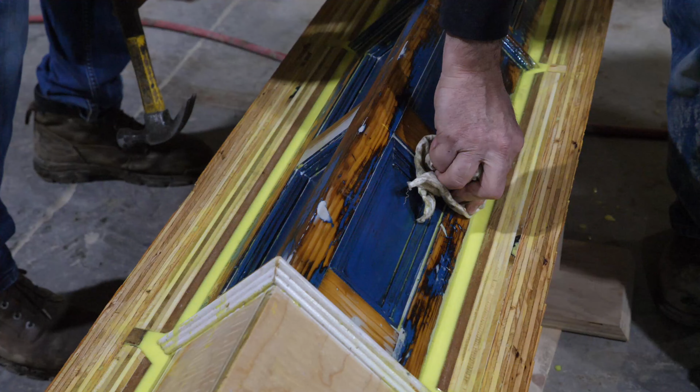This would have been out of probably an 1850s house. So, I mean, you can even see they used an old growth pine to make it. You just never see the lines that close together. And then Tim did a great job repairing it. He made some moldings that match the old. Let's see that right there. Great, nice job, Tim.

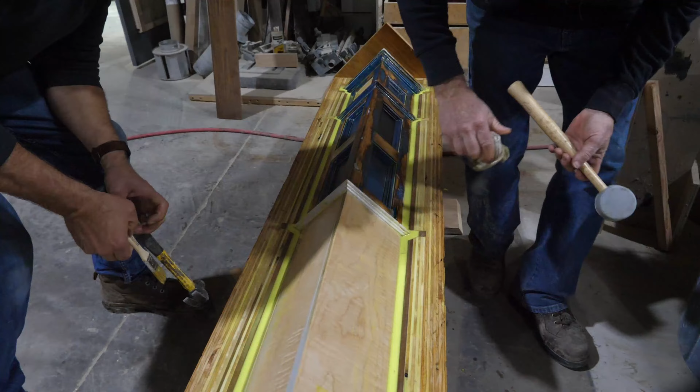Once the mold is poured, is that original piece still going to look like that? Yeah. It just peels right off? Yeah, supposed to. That's our hope. Yeah. So we sprayed it with a silicone mold release spray. But sometimes the porosity of the different materials grabs that rubber and it makes it real difficult.

You know, it's the first one of this complexity that we did, as large as we did, and there's just so many nooks and crannies in the old post that the rubber grabbed too many places that we couldn't get it off, and we started trying to pull it off and we ended up ripping the rubber. So I think as we're taking it off too, we're not sure if this is going to go back together when we pour the new mold as we thought.

And I think it's going to be such a great mold that we want to make it out of something that's more durable. So I think we're going to make it completely out of metal now. So that's why Missy's here. Yeah. So I think what we want to do is flange 4 pieces. Okay. 1-inch flange. Yeah. You know, with holes that align it every, I don't know, couple inches, every 3 inches or something.

And then Tim's going to take, you know, looking at it from the side view, it's got the flange. He's going to make these little plugs because we really like this so much that I want to pretty much duplicate the centers and everything. So then he'll make those and we'll screw those on there on each panel. So we need 2 holes in each one, probably like a 10-32 or something.

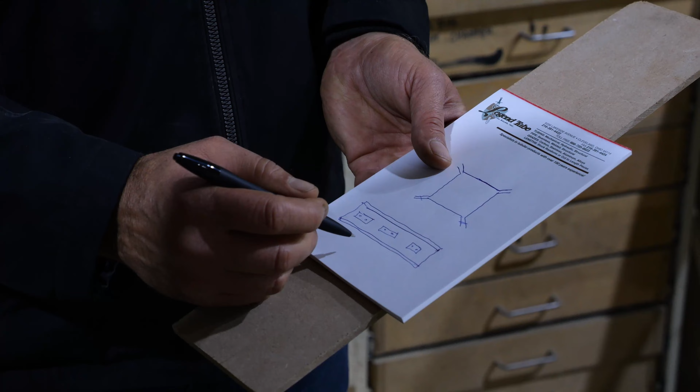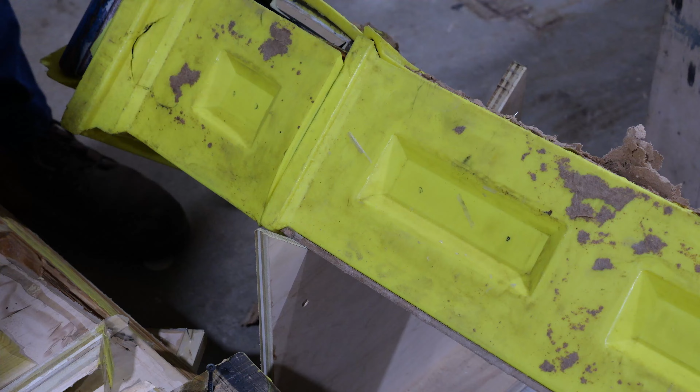Okay. So basically you'll be putting a hole here, you know, we could just stay the same distance from the edge or something on all of them. And then he'll glue those on there. And then this top part, he's gonna make a rubber mold again of this. And then we'll pour everything. And then we'll pull this outer box off in 2 pieces, cut the rubber, peel the rubber. So then you unbolt the 4 pieces of metal. Okay. So it almost has to work, right?

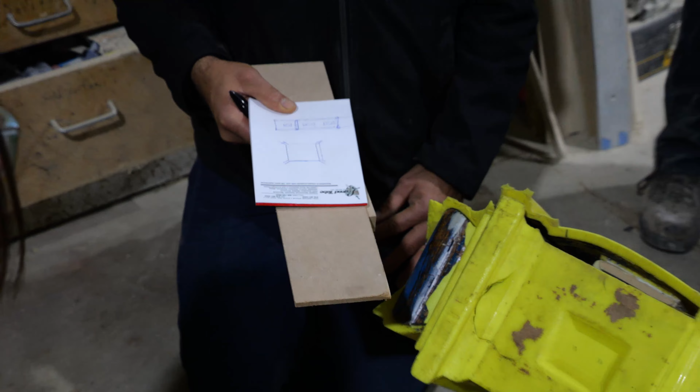Okay. So we'll just duplicate this thing up basically exactly. Tim's gonna make his plugs, you know, the same size as this. We just like this so much. I mean, look at that. Yeah, it's a really nice detail. You know, some craftsman 150 years ago made all that. So it's pretty cool.

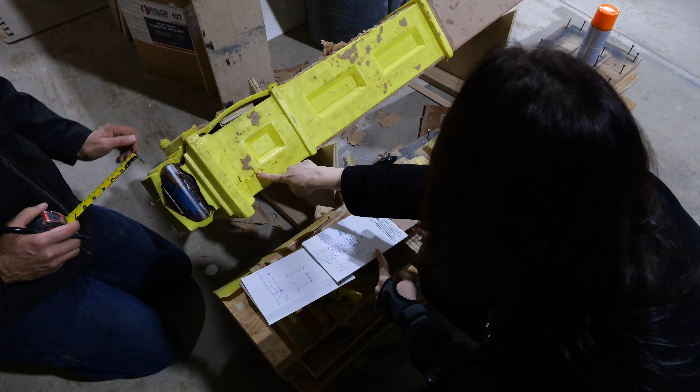And it looks like this is not centered. See that? 4 by 3.5. I bet if you look up 4 by 3.5, it's the golden ratio, yeah. I bet it is. So it's pretty amazing that they proportioned and moved things around instead of just centering it. You know? That they felt like it was worth it.

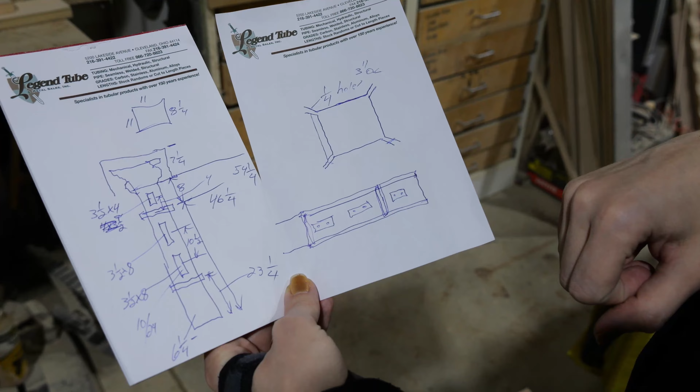So I'm going to take all these dimensions back up to my CAD program. I'm going to create one of the panels of the 4 with all the dimensions that we did with holes added in, and then I'll duplicate that 4 times. To have Grant weld in a little stiffener in there, and then another stiffener at the bottom. And then at the top, you'll have to weld a flange in for that box to come down and sit on.

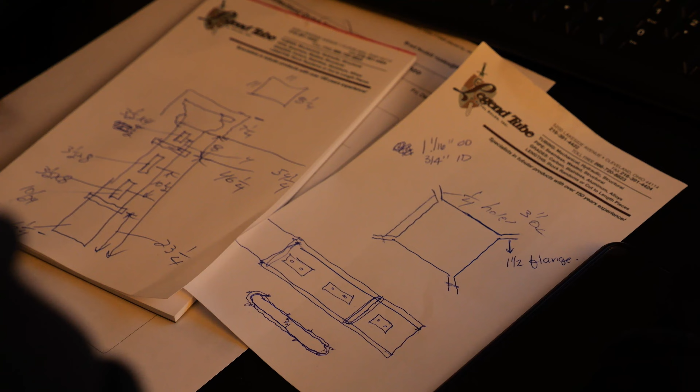That was quick. It was really quick.